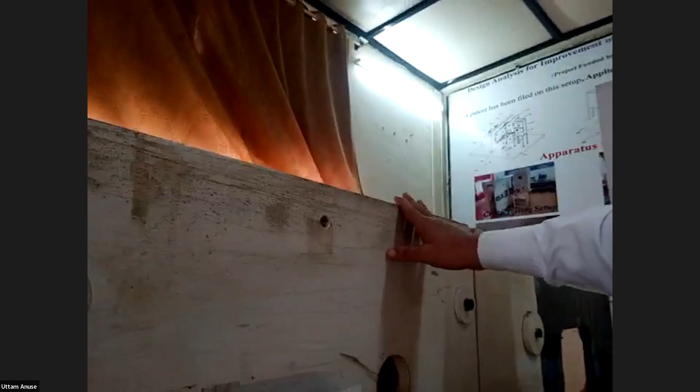Now I have just touched this cylinder. This is a hydraulic cylinder. In the cylinder there is a piston and piston rod. So the working area of that cylinder we have to calculate. How to calculate the working area? From the bore size of the cylinder, the piston and piston rod area we have to deduct. So you will get the working area. That is called A. Correct? So force upon area, that is the pressure.

Okay. Force, from where have we got it? Force is breaking load divided by 50. This is the force. And A means working area of the cylinder. How to calculate? Bore area minus piston area minus piston rod area. You will get A. So force divided by A, you will get the pressure. So this is the pressure dial. With the help of this, we can adjust pressure. Suppose pressure is around 50, then we can adjust here.

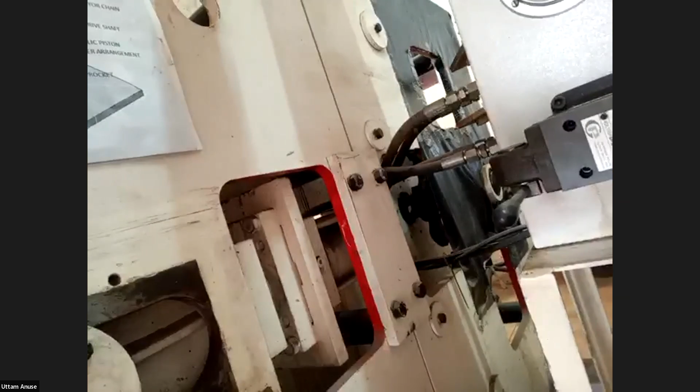So that means on that particular length measuring load, we have applied the load on the chain. Correct. So in this machine, where is the chain actually? Here is one shaft. Can you see my fingers? Yes. Here is one shaft. And if you go to the back side, there is also one more shaft. And inside the machine, there are 4 sprockets. Have you seen the sprocket? Yes, sir.

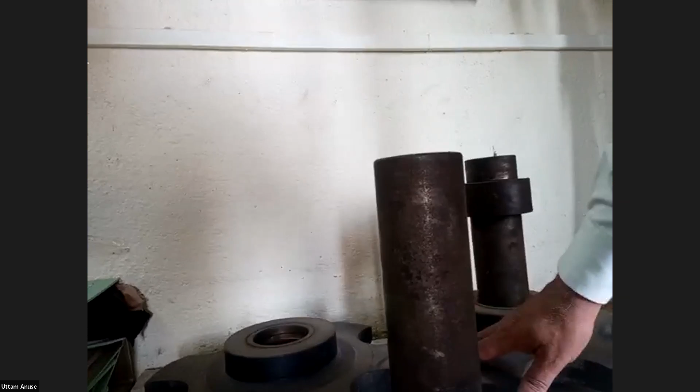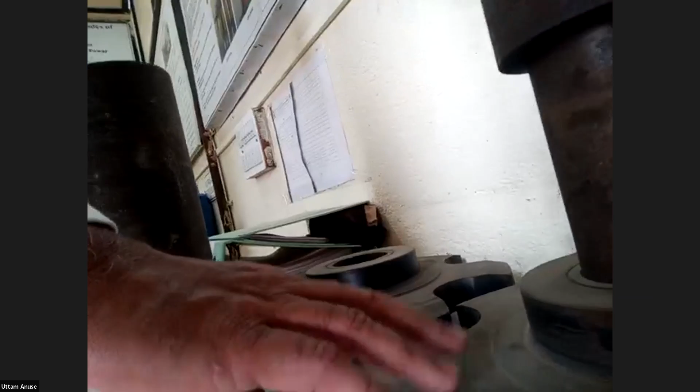Otherwise, I will show; there is a spare sprocket with us. So this is the sprocket, correct? Such a sprocket is used with a sprocket chain. Your cycle chain also has a sprocket. Similar types of sprockets are there, and all these sprockets in this machine you can see on this side.

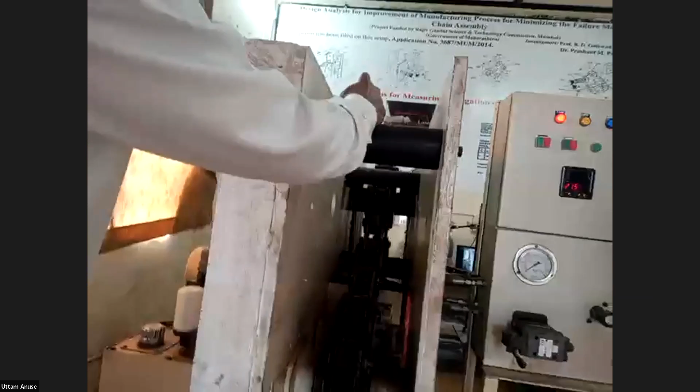So here is one sprocket. At the bottom, one more sprocket is there. At the top, one more sprocket, and backside, one more sprocket is there. So totally 4 sprockets are there. One is the driving sprocket at the backside, and this is the driven sprocket. Here's one sprocket mounted on this driving shaft, and this is the driven shaft.

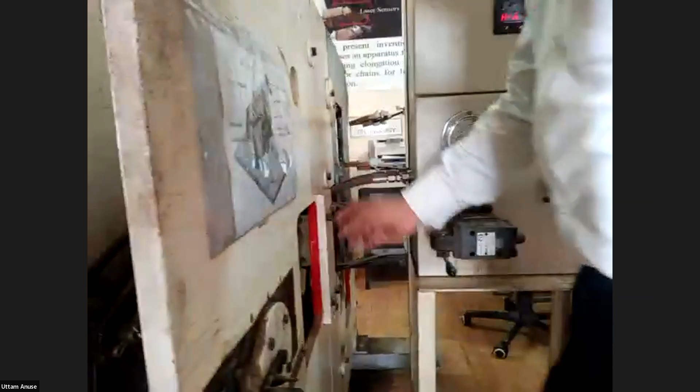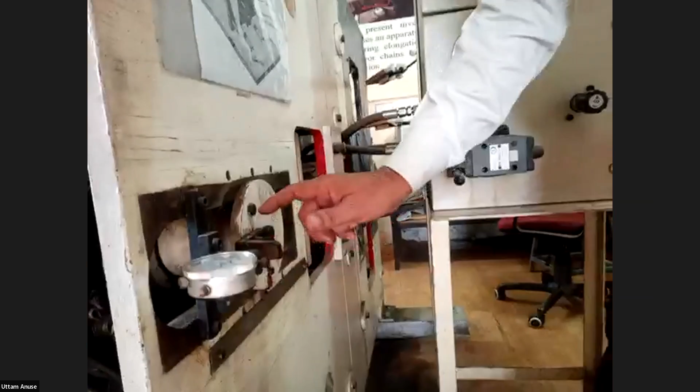And here is one attachment I have made, which is attached to the dial gauge. Here is the dial gauge, and here a slot is provided in order to get the displacement of this shaft. In this machine, the backside shaft is a fixed shaft, but this shaft is movable in the horizontal direction, and the movement is tracked by the dial gauge.

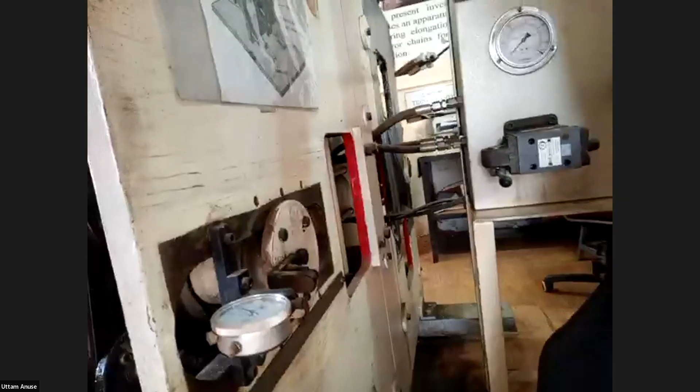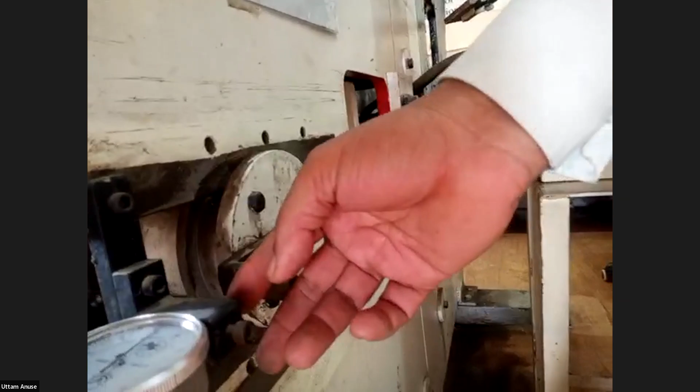So here is the dial gauge, but this dial gauge we have to calibrate. Calibration means for what displacement, how many divisions. For example, 1 mm displacement is there. Just you can see here. By applying force on the spindle, the dial will move. So this dial we have to calibrate: how much displacement, how many divisions.

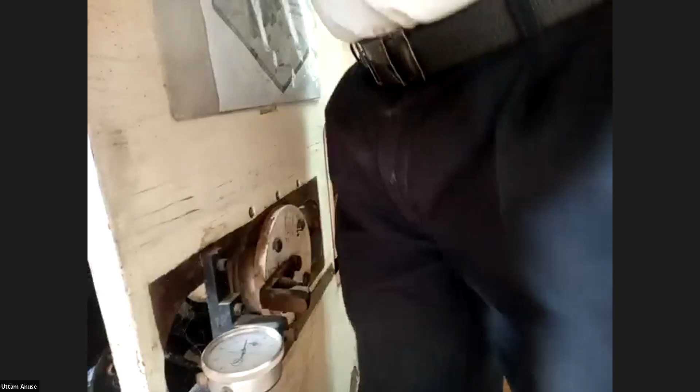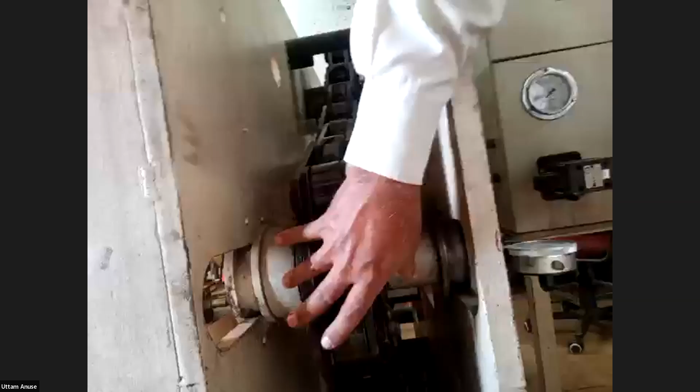This movable shaft and fixed shaft have a sprocket each, and 2 sprockets at the center are called idlers. The conveyor to be tested is mounted on the sprockets. So this is the conveyor. It is visible? Yes, sir. It is mounted on the sprockets, and this conveyor will rotate. Now I will start the machine. You will have to see the working of the machine.

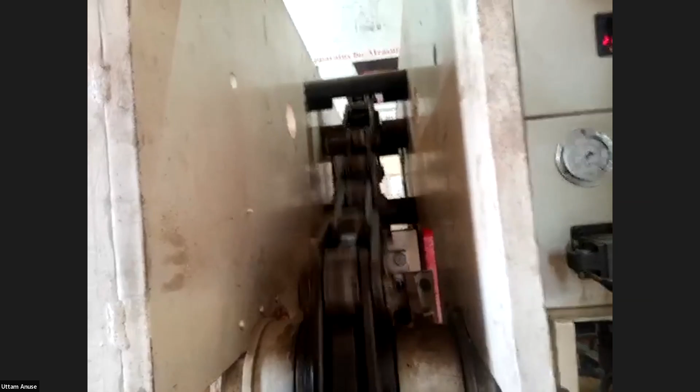Now the conveyor is working on 4 sprockets. Out of 4, 2 sprockets are idlers. One sprocket is on the driving shaft, and 1 sprocket on the driven shaft. And over this driven shaft one dial gauge is mounted, meaning the displacement of this shaft we can measure with the help of the dial gauge.

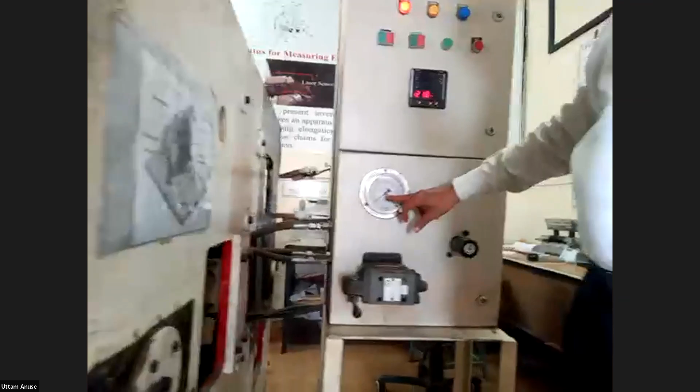So initially we can set the pressure as per the criteria of the Indian standard, that is breaking load divided by 50. So this will give the force. Force upon area, and area means our hydraulic cylinder area we have to calculate. So force upon area, that will give pressure. This pressure we have to set here, adjusting these buttons. That means whatever load is decided by the Indian standard, it is actually on the conveyor.

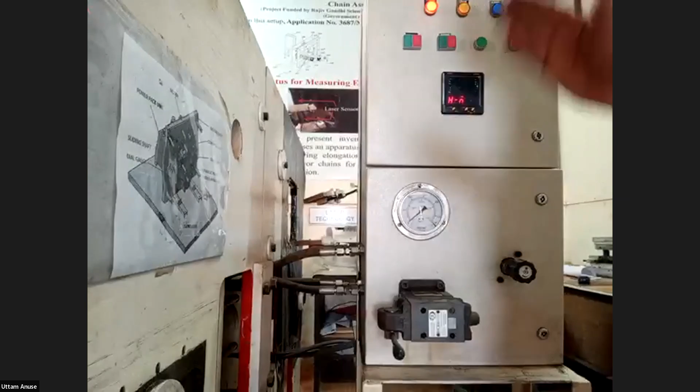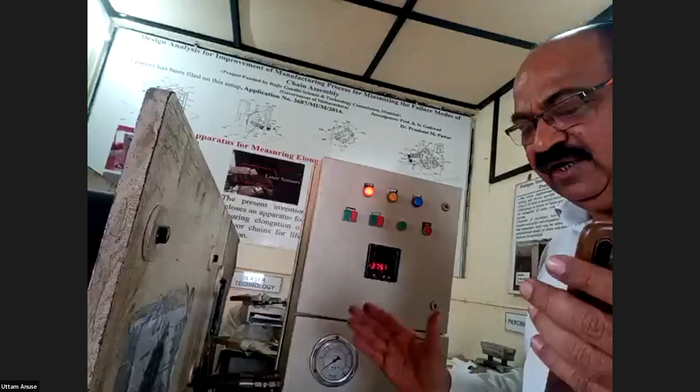And we can go on rotating this sprocket. If there is a certain problem in the conveyor, then the elongation will cross the limit set by the Indian standard. The length of the conveyor is 3000 mm. In the working load condition, meaning the length measuring load, that is 60 divided by 50. So once this load is applied on the conveyor, if the conveyor crosses the limit of 7.5, meaning for a 3000 mm conveyor the allowable elongation is 7.5.

But even after a number of rotations, if the limit is not crossed, this dial will not move, it will remain as it is. That means elongation is below 7.5. That means this chain is passed and it is useful for working in industry.

Similarly, we can preload the conveyors. Preloading conveyors means we have to test the conveyors as per the working load used in industry. So how to calculate this working load? 1/3 of the breaking load. So there is a 60-ton breaking load, divided by 3, that is 20. So 20 is our force. Force divided by the working area of the cylinder, you will get the pressure. You can set the pressure and go on rotating this conveyor.

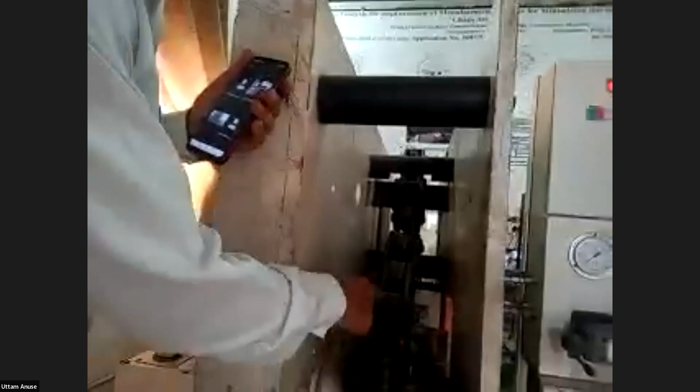If a problem is not there, definitely the joints in the conveyor, for example, you can see there are a number of joints in the conveyor. Here is one joint, the second joint, the third joint, and it is expected that these conveyor links rotate about these joints. If rotation is not there, sometimes the sprocket or the conveyor will get jammed, and there is a possibility of breaking that conveyor.

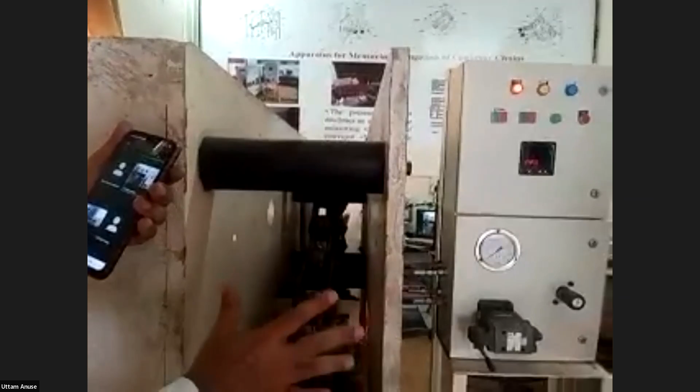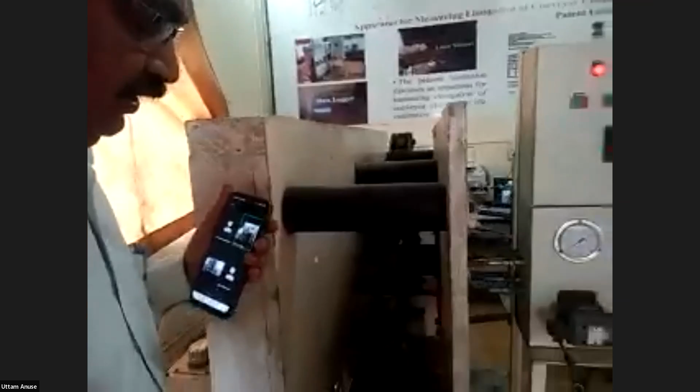So all joints of this conveyor are expected to rotate easily. That is called articulation in English, easy to move. And this articulation comes under preloading. So before length measuring, we have to loosen these joints, meaning we have to remove the working traces from manufacturing, loosen these joints, and the conveyor is expected to rotate easily on the sprocket. So this is the preloading.

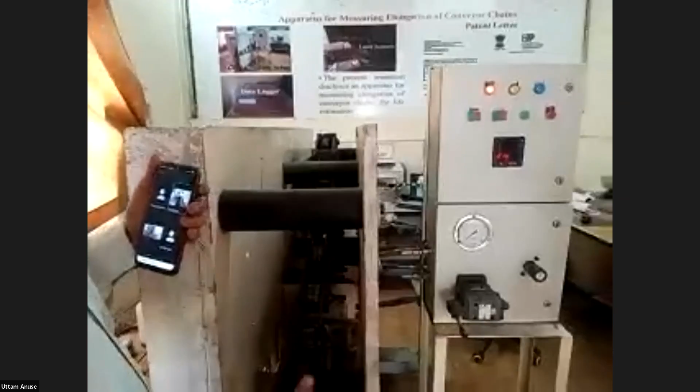Preloading formula: working load, force divided by area. What is the force? For preloading purposes, as per Indian standard, breaking load divided by 3. So this is the force, and A means the working area of the cylinder. You will get the pressure. That pressure we have to set on this dial gauge, and we can go on rotating this. So these two tests we can perform on this machine.

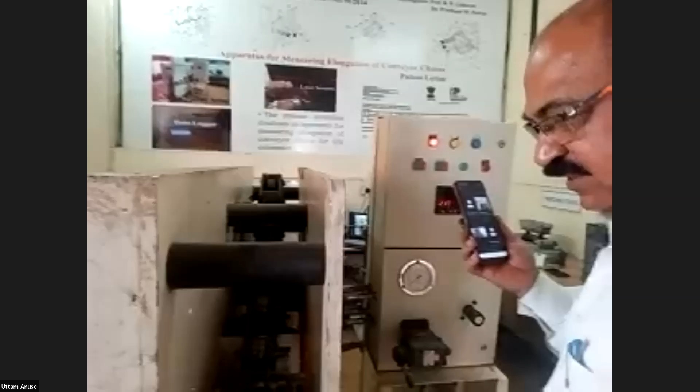Is it correct? Anybody having any problems up to here? No, sir. Hello. Yes. No, sir. Anybody having any problems up to here? It is clear. Yes, sir. Yes, sir. Okay. Is it necessary to repeat or not? Or shall I repeat once again in short? Or not necessary? Yes, sir. Okay, in short, once again I will repeat.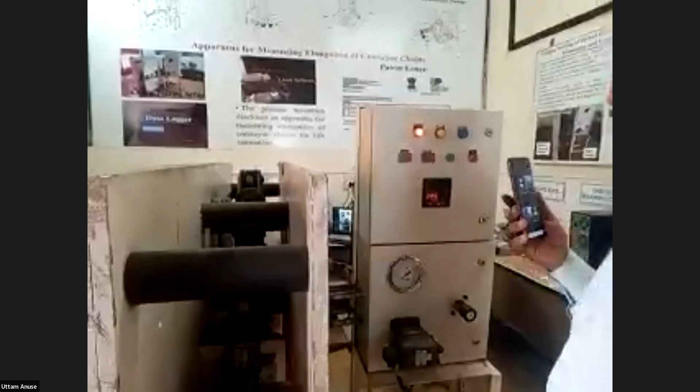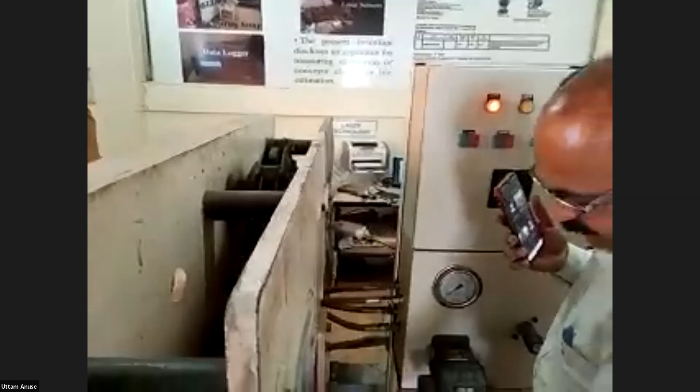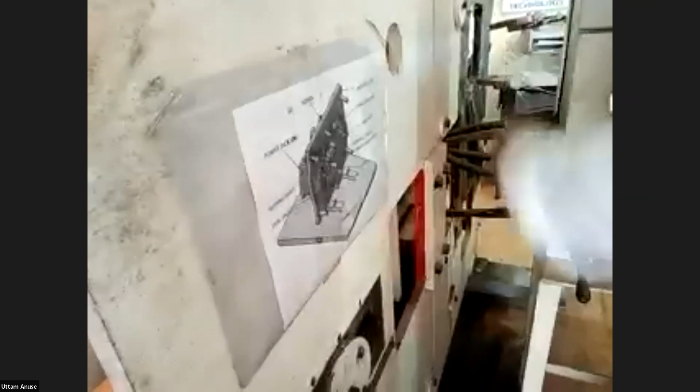So this machine has 4 sprockets. You can see my hand: at the center, top and bottom, there are 2 sprockets. Those are called idlers. And see my fingers, this is one shaft, and on this shaft inside the machine there is 1 sprocket. And if you go horizontally to the back side, there is one more shaft. I will just touch that shaft. You can see through this camera. So here is the shaft, correct?

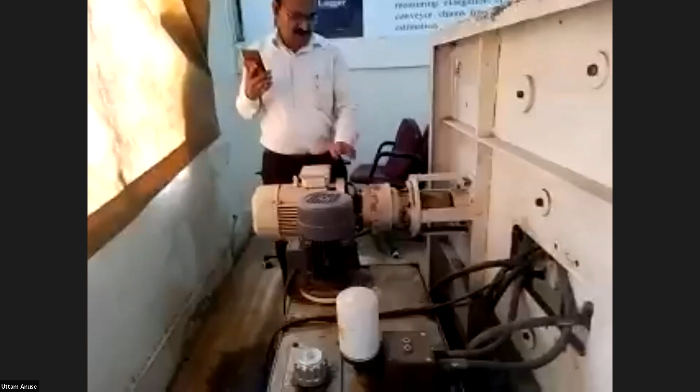So this is one shaft, and a few minutes before I touched that shaft. This shaft and that forward shaft are in one line. So there is one more sprocket inside, and this shaft is rotated by a gear drive. There is a motor. Here you can see on this side there is a motor, a coupling, and here is the shaft. Once this motor starts, the shaft inside will rotate, the sprocket will rotate, and the conveyor will rotate.

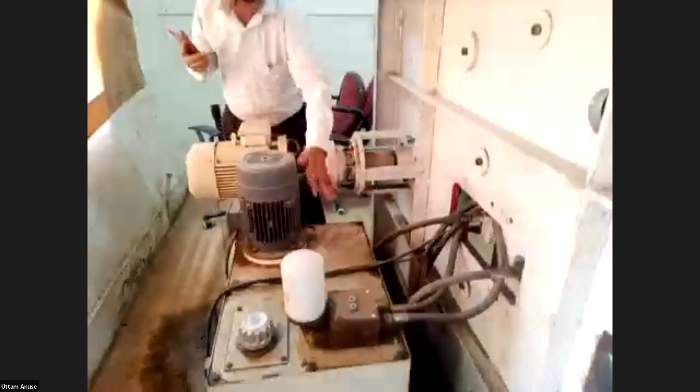And this unit, it is the power pack unit. So what is the use of the power pack unit? Inside the machine, one hydraulic cylinder is there. Forward and backward movement of the piston is done by this hydraulic power pack unit. Okay, this is the hydraulic power pack unit.

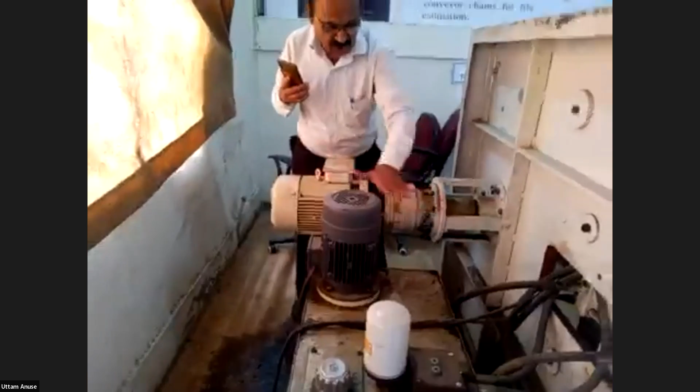Means these motors are only used for rotating the sprocket, and this motor along with this pump is used to give the force on the conveyor. Okay, this power pack unit is used to give the force on the conveyor through the sprocket, which is mounted on that shaft. So these two devices are there.

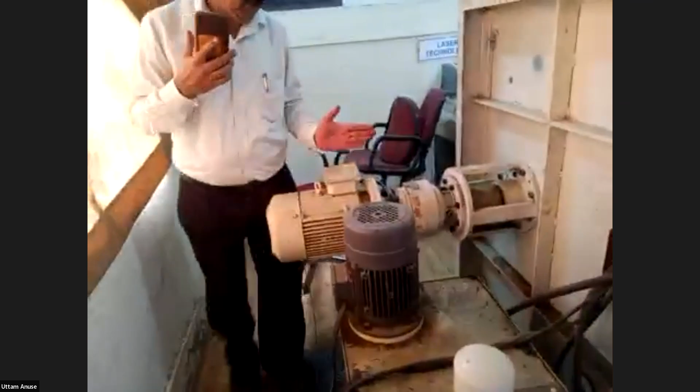This is for driving the shaft and sprocket over this, and this power pack unit is expected to move these conveyors in the horizontal direction once slackness develops in the conveyor. Okay, so these two important things are there.

So with these two devices, we can measure the length of a chain in initial condition for 3000 mm. 3000 mm means the length of this conveyor. If you put this conveyor on the ground and measure it with a tape in mm, the conveyor length is 3000 mm.

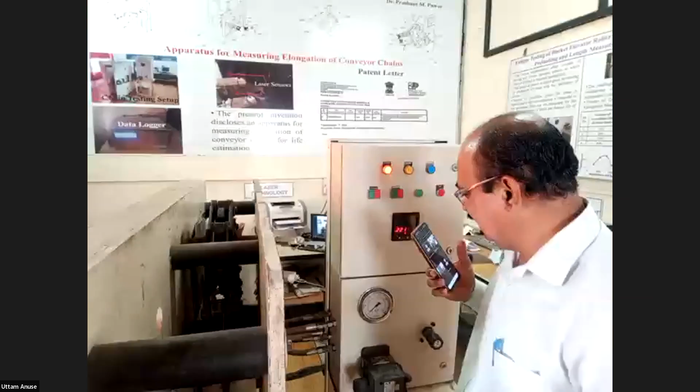And if you apply the measuring load, this conveyor should not cross the limit, means 3007.5 mm. If it crosses this limit, the conveyor is not useful to work in any industry. We can reject that conveyor there itself. And if it is not tested, the problem will occur in running condition, and there is huge loss to that industry. So initially we have to test these conveyors in the manufacturing stage.

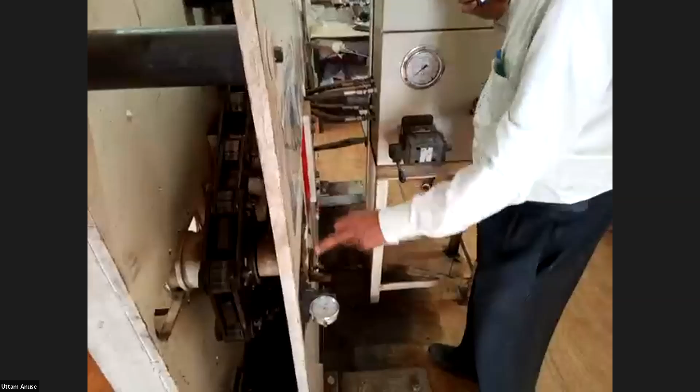For this purpose, we have developed this machine, and it is very simple. Two shafts are there, two idlers are there. One shaft rotates along with the sprocket; the second shaft has a sprocket, but along with the rotation, there is horizontal movement of this shaft. The horizontal movement of this shaft is measured by the dials.

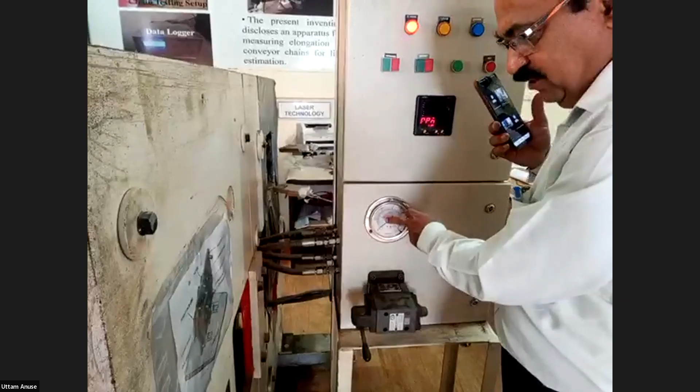Okay, and load is given on these chains by calculating the pressures. Pressure means particular loads. Particular load means the breaking load divided by 50, which is the formula of the Indian standard. And how to calculate pressure? This load divided by the working area of the hydraulic cylinder. Here you will get the pressure.

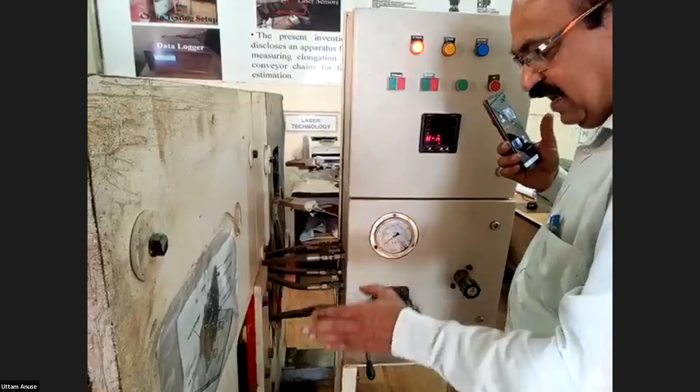That means this much load we have applied on the conveyor, and after applying the load, how much elongation of the chain is there is measured by a calibrated dial gauge. So this is the concept of our preloading and length measuring machine. Okay, so up to here it is clear, or does anybody have any doubt?

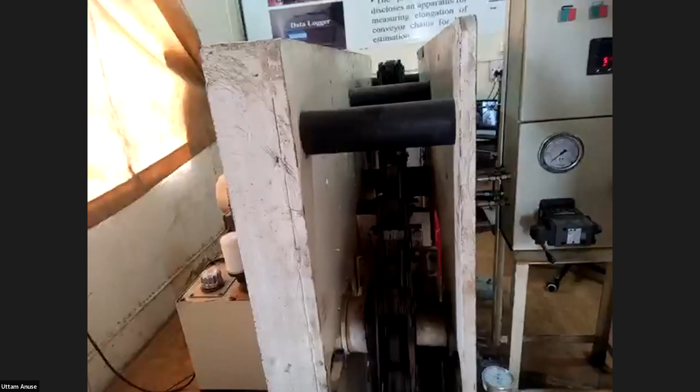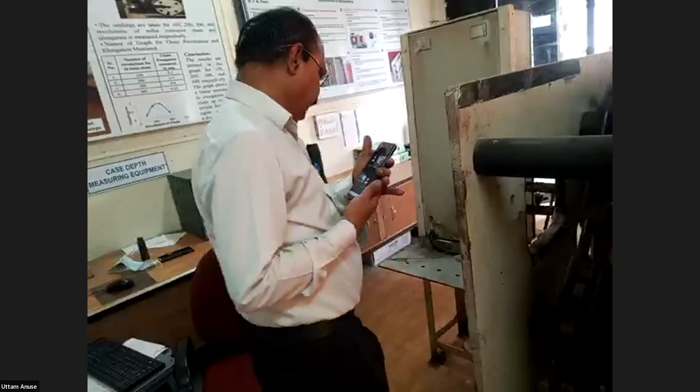You want to see it in working condition? Have you seen it in working condition, or shall I repeat it? Hello? Seen, sir. Sir, it is seen. Okay, once again I will show both sides. You can see the back side also. Here. Is it okay now? Yes, sir.

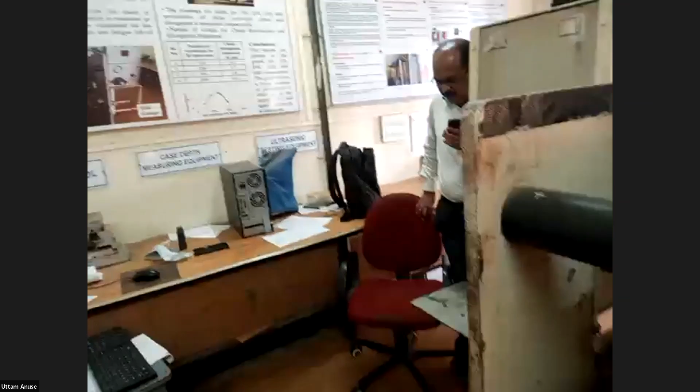One more thing I have done here. You might have seen a bicycle chain or motorcycle chain. There are a number of joints. Now you can see here, conveyors also have joints. Now I will show one more application of this machine.

See, here it is visible. With my fingers, I have touched the two pins of the conveyor. Is it visible? Yes, sir. One pin, this is the second pin, and this is the conveyor link. Okay, so here white marks are there, and here one stand is there. This is one stand, this is the second stand.

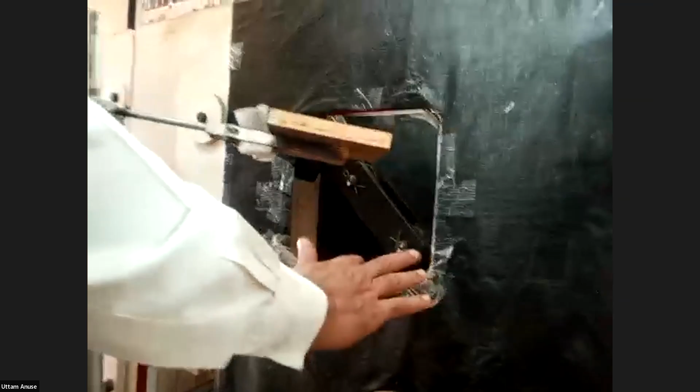Actually, what we have done here, I have kept one sensor. So here there is a place for a sensor, here is also a place for a sensor, and the sensor uses laser technology. With the help of these sensors, the distance between these two pins gets measured initially with a laser sensor. And this sensor is attached to the computers.

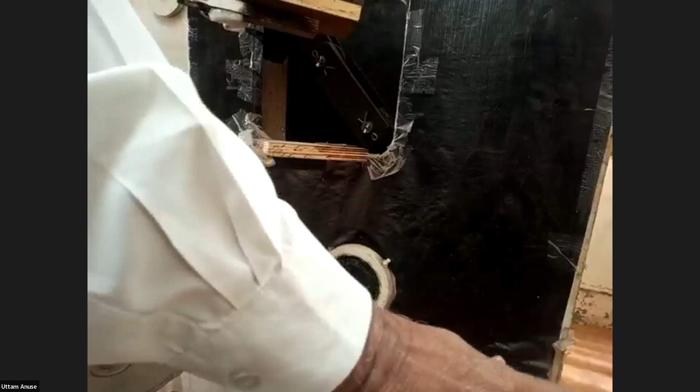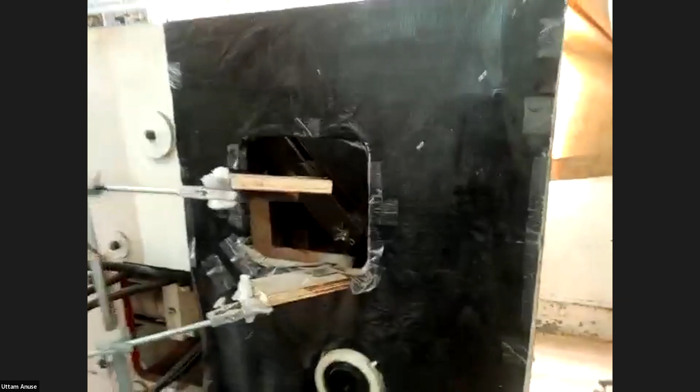So initially, suppose we have got this distance with the sensor on the computer as 150. Now you can start this machine. The number of links will come in front of the sensor. Now I will make a small movement of this conveyor. Now the next link will be there.

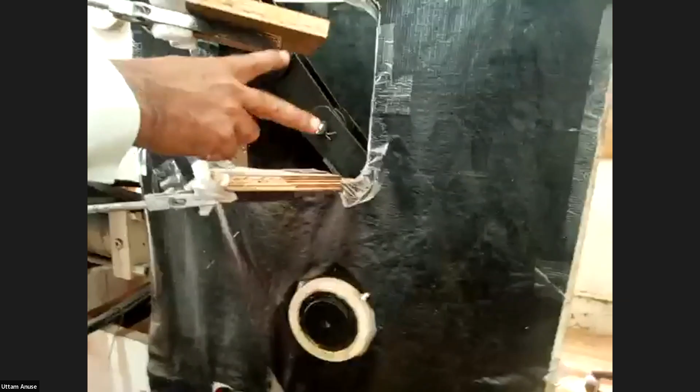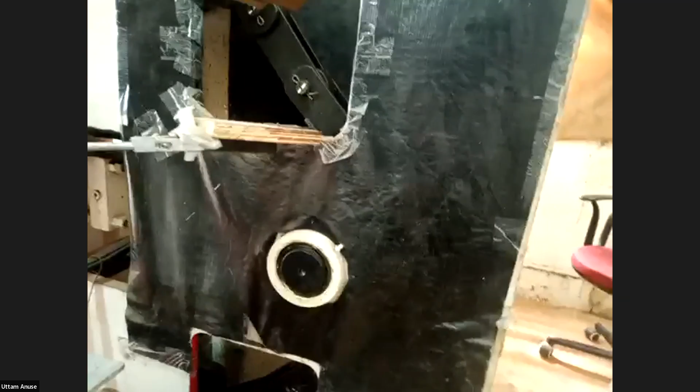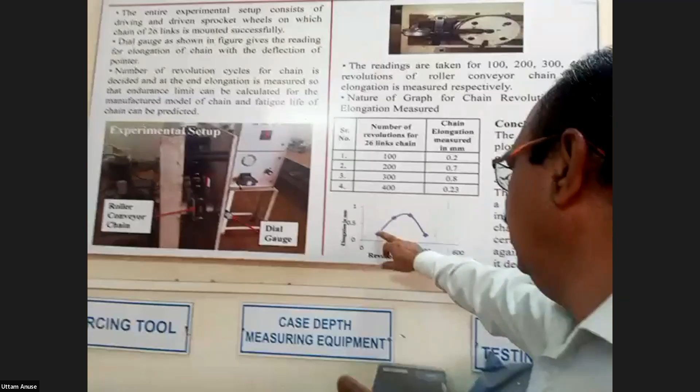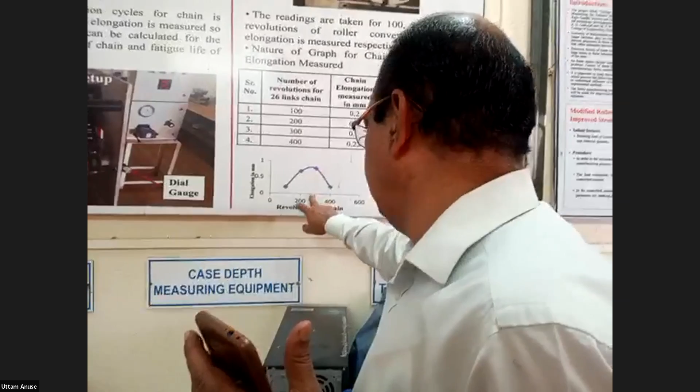So here the elongation goes on increasing, and here is the maximum limit, and corresponding is the revolution. Maximum limit corresponding is revolution. Means from 0 to this much revolution, you can make use of this conveyor, and after that you can replace these conveyors. Otherwise the chain will break.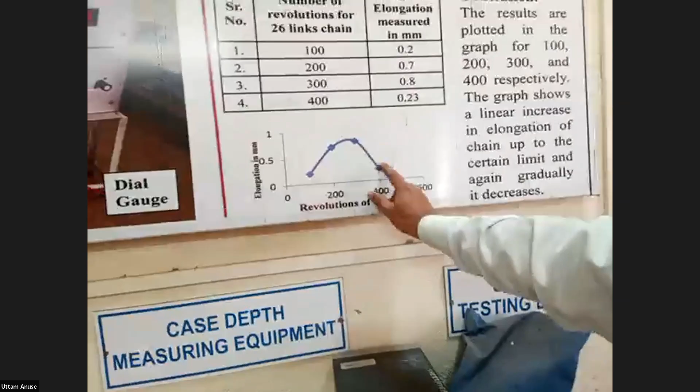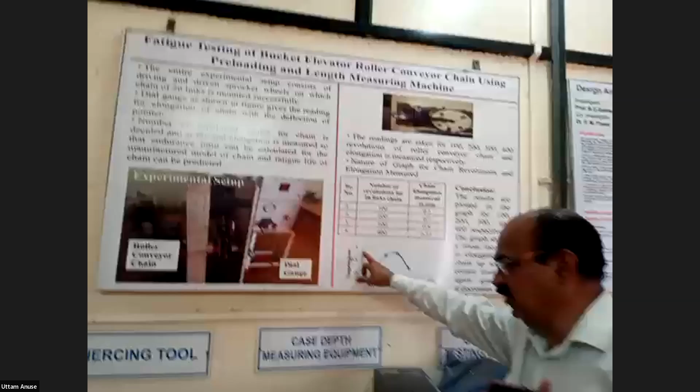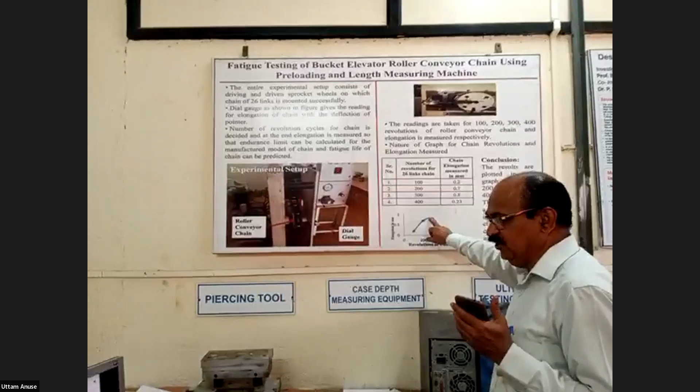So from this graph we can conclude that you can run these conveyors up to this elongation. Up to this elongation, you can give the elongation of 7.5 like this. As per Indian standard, 7.5 elongation is there. So at this maximum point 7.5, once we get that elongation, you have to stop the working of that conveyor. Otherwise you can go on working. Means you can continue the conveyor's revolutions until you get the 7.5 elongation.

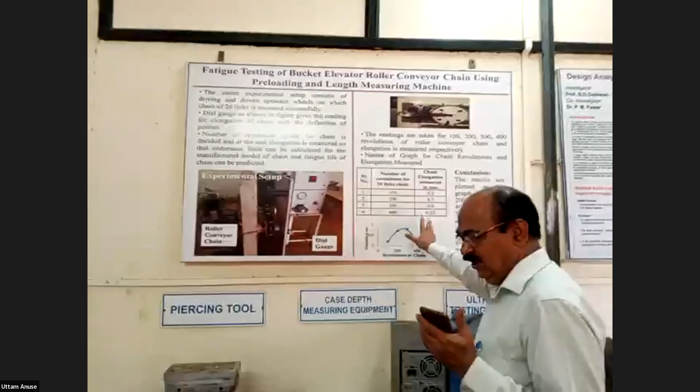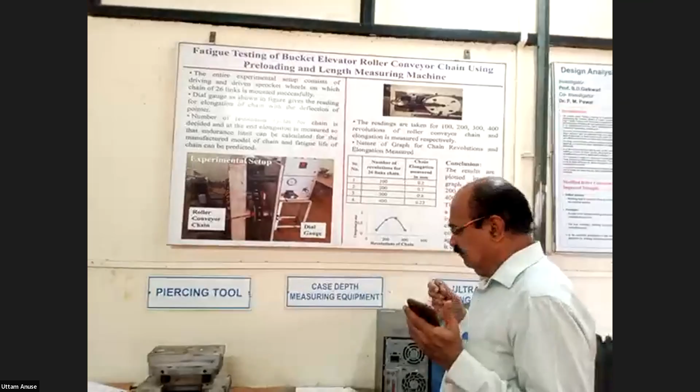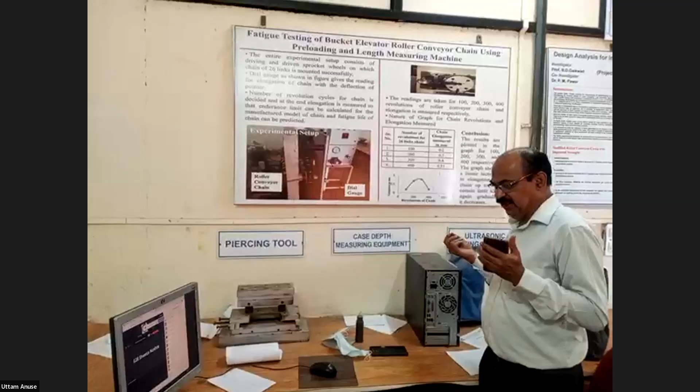So this is one more research part we have done in these preloading and length measuring machines. So three characteristics of the conveyor chains we have tested: elongation versus revolutions, second preloading, and length measuring. So preloading, length measuring and elongation, it is expected to test the conveyor in the manufacturing stage, and then we can allow that conveyor to be installed in the sugar industry, fertilizer industry, paper mills, oil mills. Whenever a consumable or automation part is there, you can allow this conveyor.

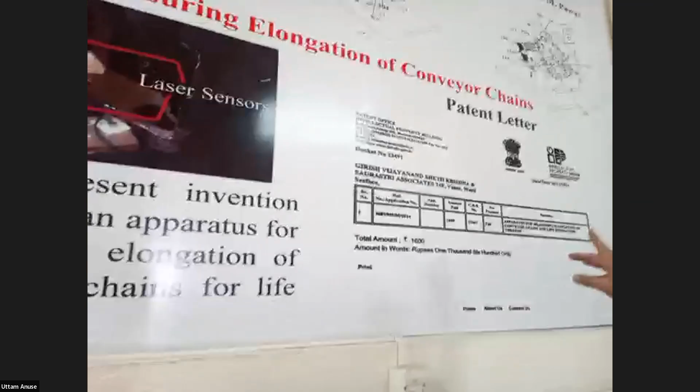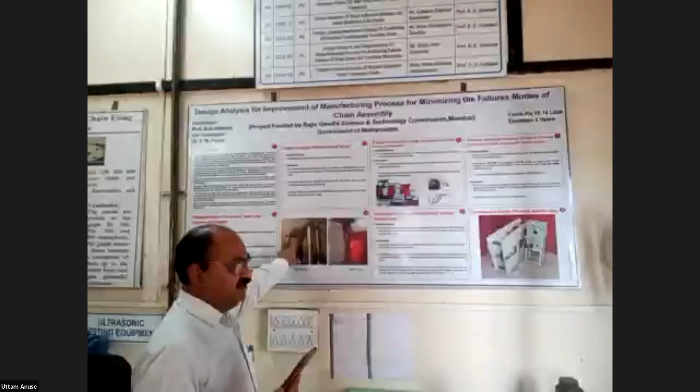And here's the breaking load testing. This is the UTM machine which exists in our college. 100-ton capacity is there. And this is the actual conveyor chain we have tested. This is the breaking part. The pin has broken under that particular load. So the breaking test is expected to detect the capacity of the conveyor.

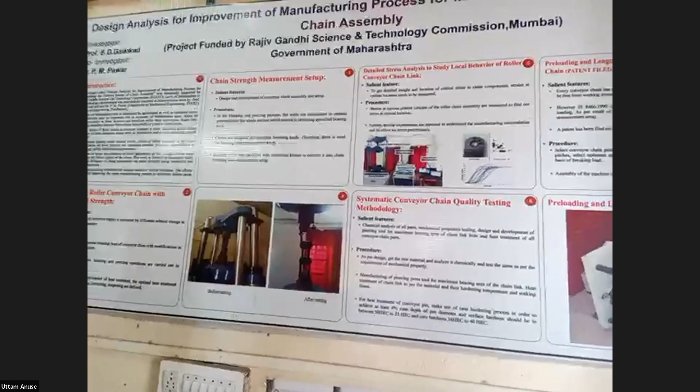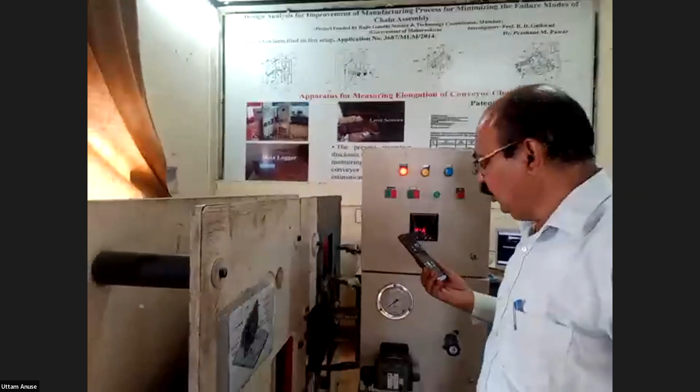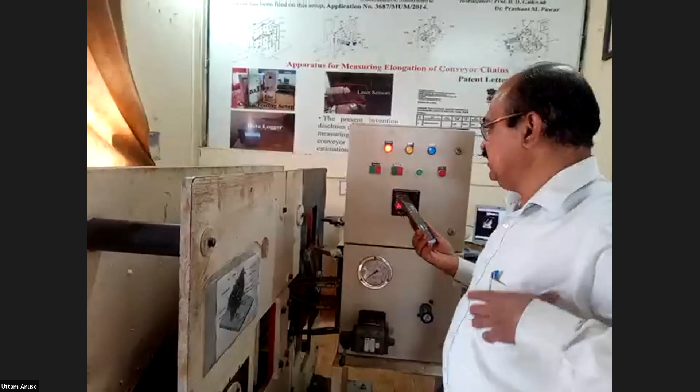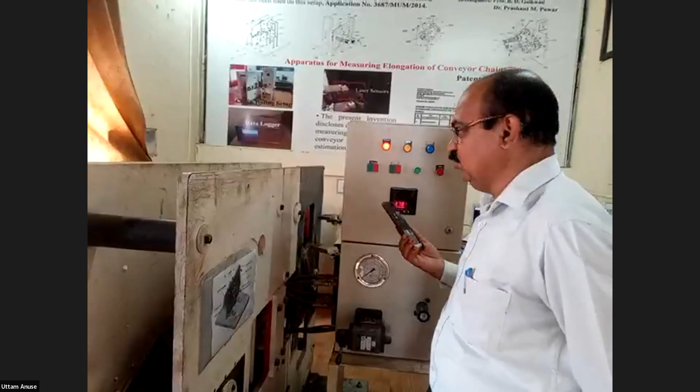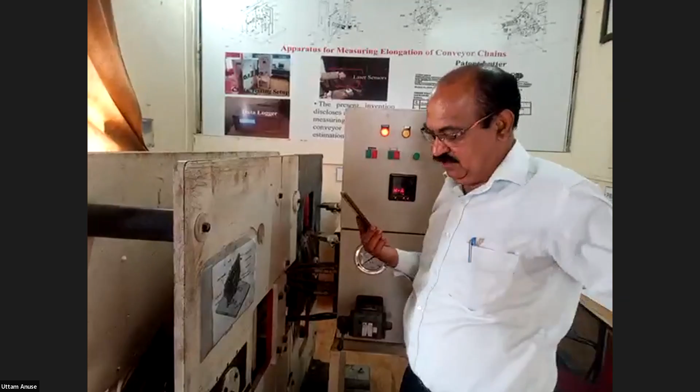Means once we purchase the conveyors and they fulfill these 3 characteristics, we can decide how many years we can make use of that conveyor. Before failures, we can get the intimation of this conveyor. So this machine patent we have filed. Our ME students also have done their ME research work with the help of this machine.

At the same time, you can see here, the honorable Padma Vibhushans, Dr. Anil Kakodkar and Dr. Chidambaram, have visited this lab. You can see the photographs of this lab. So the Honorable Dr. Chidambaram, Indian scientist, has visited this lab. At the same time, Padma Vibhushan Dr. Anil Kakodkar also visited this lab. So this lab is useful to our farmers, useful to the sugar industry, and we have made the survey and developed such machines which are useful to our sugar industry.

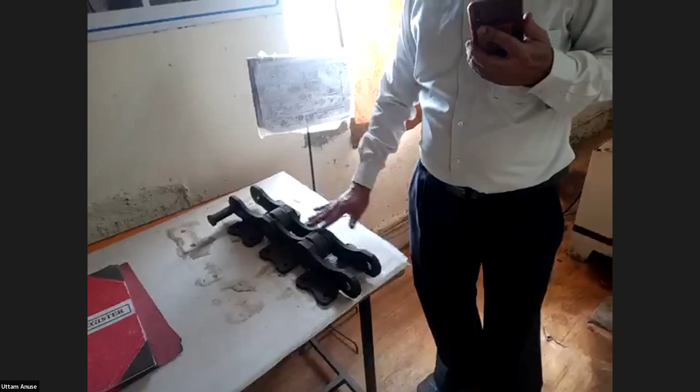And one more research work we have done in the conveyor also. You can see in the sugar industry, the initial conveyor, that is the cane carrier conveyor, means tractors or trucks will dump the sugar cane on the conveyor. There is one conveyor that is called the cane carrier conveyor. Now you can see here, this is one conveyor. So we have gone through the optimization of the conveyors. Nowadays, if you visit the sugar industry, you will see this type of conveyor at the initial stage where sugar cane is dumped. That conveyor is called the sugar cane carrier conveyor.

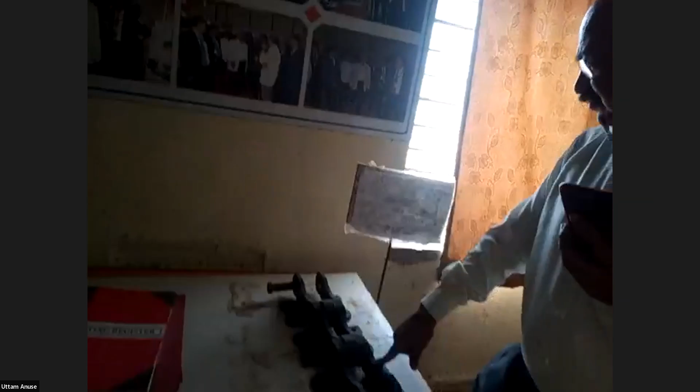So here you can see the curves are there, a number of curves are there. See my fingers, curves are there. But nowadays, if you visit the sugar industry, curves are not there. But I have given suggestions to the manufacturer: you can make the curve like this, so that the per meter weight of the conveyor chain will get reduced. And you might know, in the sugar industry, the length of the conveyor is more than 300 meters. So that much load of the conveyors will reduce, and that will help to reduce the power of the sugar industry.

And once the power of the sugar industry gets reduced, the manufacturing cost of sugar will get reduced. So this is also one of the developments I have made in this lab. Here is conveyor optimization, maybe bagasse carrier or cane carrier chains. Here I have done one sample: without affecting the breaking load, without affecting the capacity of the conveyors, I have reduced the weight per meter of the conveyors by providing slots. Where there was a non-useful place, I have provided this slot.

That means there is no effect on the quality of the product, the breaking load of the product, or the capacity of the product. We can reduce the weight of the conveyor. This is also called one of the value engineering techniques. We can increase value while reducing the cost. So cost will also decrease: the per meter weight will decrease, so the raw material cost will also get reduced.

At the same time, power is required to drive the conveyor. Once the weight of the conveyor is reduced, power will automatically reduce, because you know that power is equal to force into velocity, and force depends upon the weight, how much force is required to move the conveyor. If you reduce the weight of the conveyor, definitely power will get reduced. And once the power gets reduced, the manufacturing cost of sugar will get reduced. And this is useful to our farmers also.